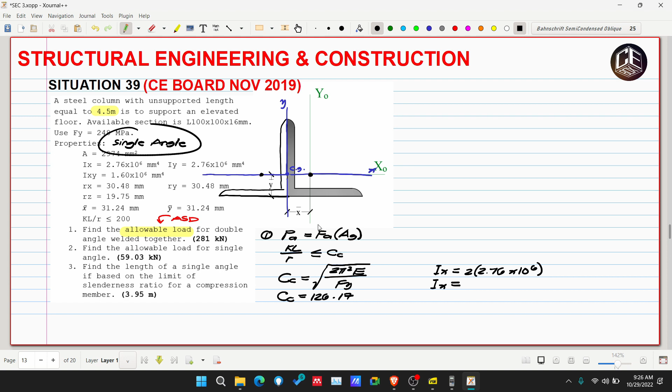So we need to solve Ix first, that's our Ix and Iy. Remember, R is equivalent to square root of Ix or I total over area cross. Let's solve this.

So, 5.52 times 10 raised to 6 millimeter to the fourth. Then, yung ating Iy dito. With respect to y, since yung ating centroid ay wala sa mismong y, kailangan nating gumamit ng transfer formula, para ita-transfer natin siya papunta rito. And remember, ang ating transfer formula is equivalent to I bar plus area d squared.

So, yung I bar natin is yung Iy, ito, 2.76 times 10 raised to 6, then plus area 2974 multiplied by d squared. Ito yung ating d, and yung ating d is equivalent to x bar. Ang x bar natin ay 31.24 times raised to 2, then multiply natin sa dalawa kasi dalawa yung ating angle bar. So, ma-solve natin yung ating Iy.

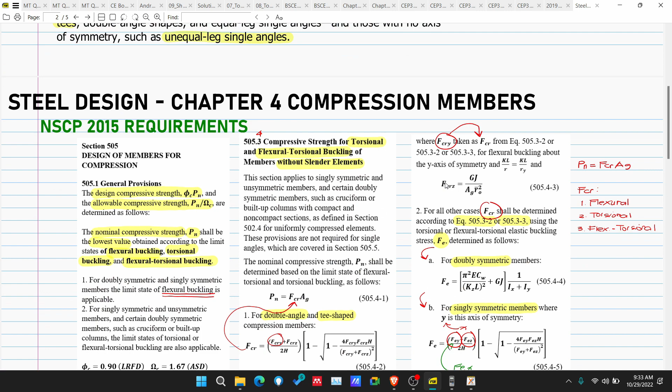Ngayon, kung long column ang ating member, FA or allowable stress is equivalent to 12 pi squared E over 23 multiplied by slenderness ratio. Actually, hindi na ako masyadong familiar dito sa equation na to kasi under pa yan sa old version ng NSCP. Sa NSCP 2015 kasi ako halos nakabase ngayon sa mga tinuturo ko. And ito yung lecture namin sa compression member under sa torsional buckling and flexural torsional buckling. So, ito yung mga equation under sa NSCP 2015 requirements.

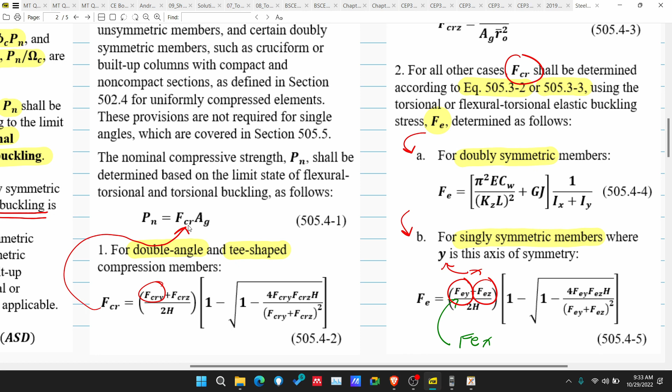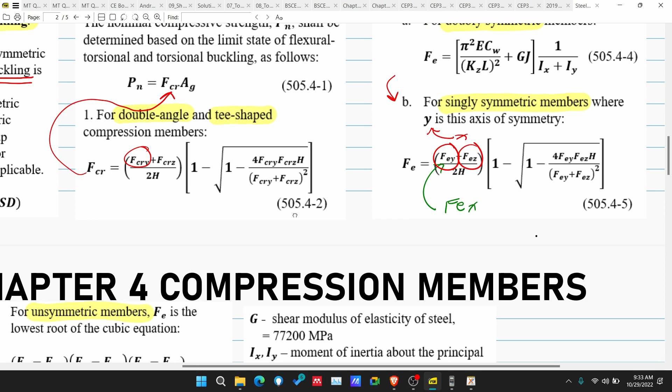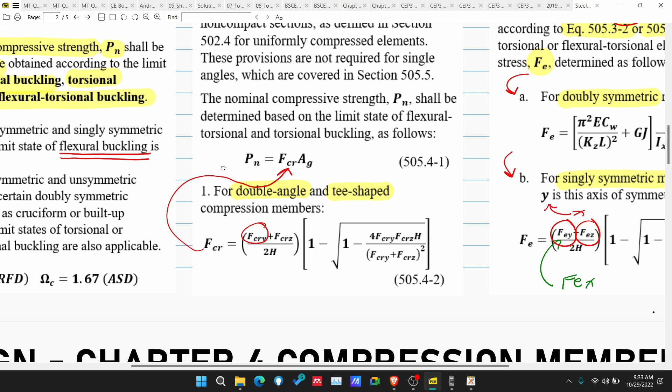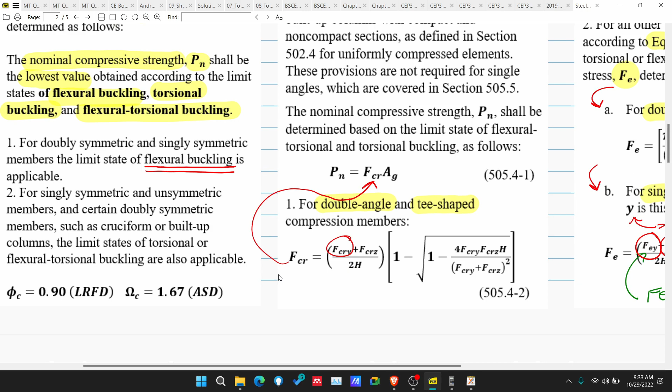Ang pinagkaiba lang naman nila is, actually mas gusto ko yung 2015 kasi ang sinusolve muna is yung nominal load, okay, which is equivalent to FCR multiplied by AG. So, overall equation, ang nagbabago lamang is FCR, depende kung ano yung ating cross-section. So, for double angle or T-shape, ito yung FCR. Then, ito naman for all other cases. So, double symmetric, single symmetric, pero pag unsymmetric member, ito naman yung ating FCR, magiging FE na siya. Then, pag nakuha natin yung FCR, makukuha natin yung nominal. So, from nominal, makukuha natin yung design strength kung LRFD, then allowable strength kung ASD. So, dito lang sila nakakatalo sa dalawang to. Okay, so mas, parang trip ko, ang NSCP 2015. Yan, so ito yung ginamit namin dun sa aming playlist.

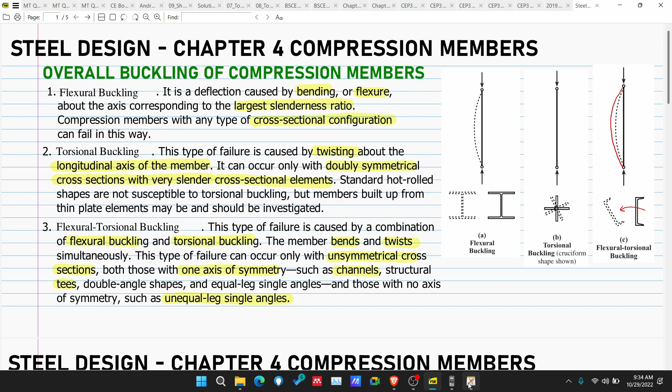Anyway, so tuloy natin yung pag-solve. So, makukuha natin yung ating FA. So, 12 pi squared multiplied by E na 200 gigapascal over 23 multiplied by KL over R, which is yung 147.73 natin. Pero hindi dapat tayo lumagpas sa... so ang ating KL over R ay 147.73 squared. So, 47.19 mega pascal. And then, makukuha na natin yung allowable strength or allowable load natin.

So, this is 47.19 multiplied by AG. So, dalawa to, 2974, then times 2.

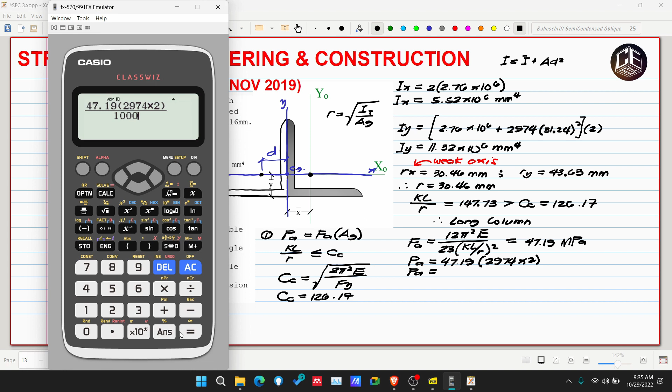Divide natin na 1,000 para maging kilonewton. So, 280.69. Ang sagot naman natin is 281 kilonewton. So, siya na rin yan kapag ni-round off natin.

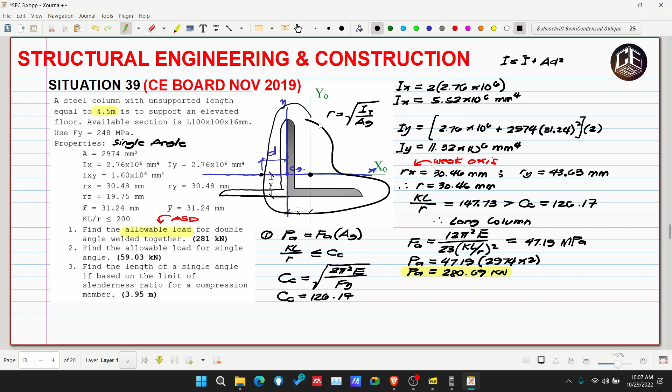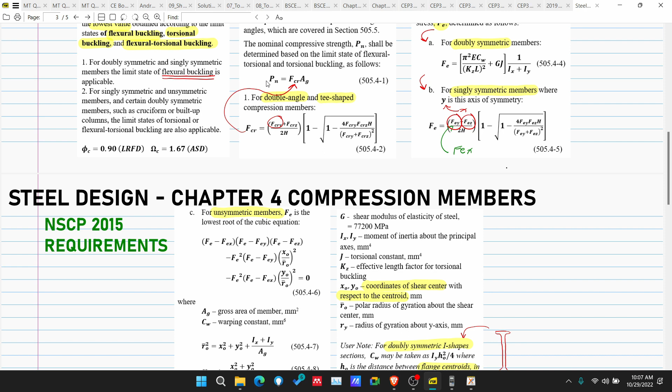Okay, so for number 2, find the allowable load for single angle. Kung single angle lamang yan, okay, ito lang, under yan sa with no symmetry. Kung tingnan natin yung lecture natin sa NSCP 2015, under yan dito, for unsymmetric members. Gamit tayo ng FE, then yun yung substitute natin as FCR sa ating PN. Then, ang equation ng FE is ito.

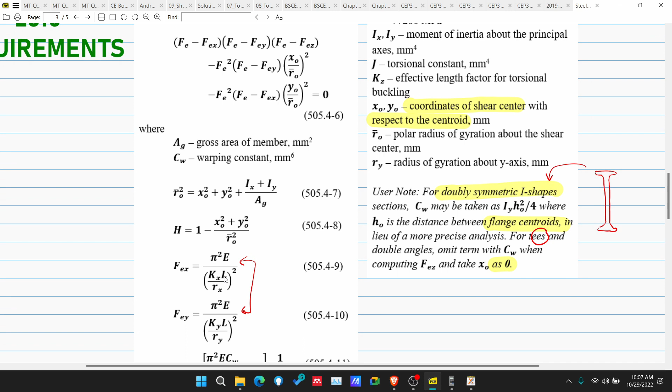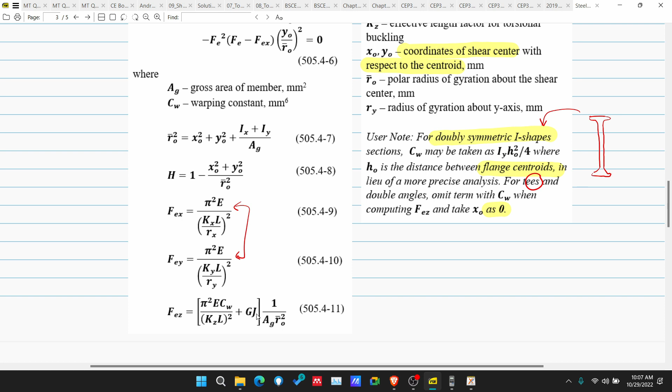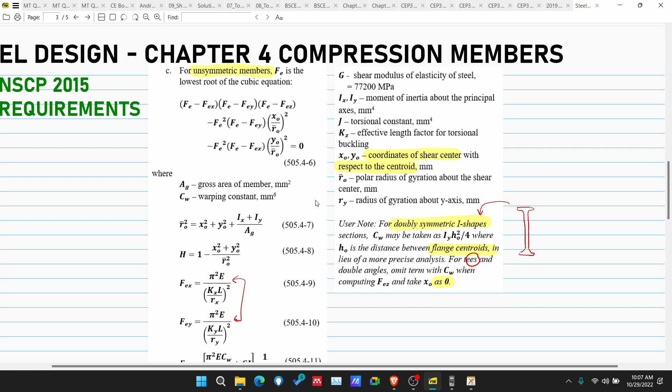Kukuha natin yung FE dito. Though, meron naman tayo mga equation ng FEX, then FEY, saka yung FEZ. Kaso, kailangan given itong mga to: yung KZ, yung J, yung CW, o yung warping constant. Okay, then, kailangan given yung X sub O and Y sub O para makuha rin natin yung R sub O bar. At napakaraming kailangan hanapin rito, pero dapat given din. Based talaga dito sa ating problem, wala naman yung mga given na yun.

So, under pa rin talaga ito sa old version of NSCP. Okay, ganun pa rin naman. Check pa rin natin yung ating slenderness ratio. Pero, yung ating angle is mag-bend sa Z-axis. Therefore, yung ating KL over R is KL over R Z. Ang ating RZ is 19.75.

So, 1.0 multiplied by 4.5 times 10 raised to 3, over 19.75. So this is 227.87, 227.85. Ang ating KL over R is greater than pa rin sa ating C sub C. Therefore, long column ang ating member.

Kaya, yung ating FA pa rin is equivalent to 12 pi squared E over 23 multiplied by KL over R squared. Ang ating FA is, palitan na lang natin yung KL over R dito. Ang ating KL over R na niya is 227.85. So, 19.84 megapascal. Ngayon, ang ating PA is equivalent to, asan yan?

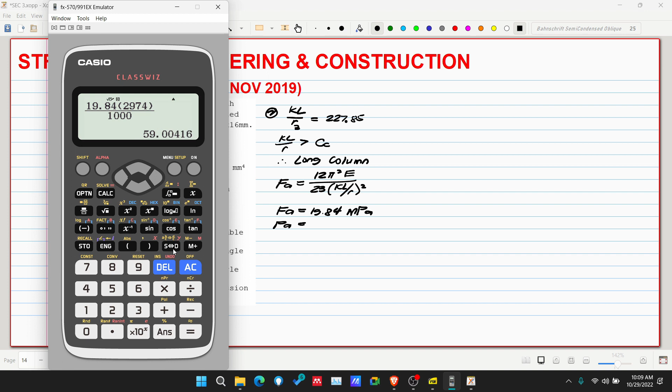Ito, ayan. So, this is 19.84. Tapos, ito kasi naka-times 2, di ba? Kasi double angle yon. Single angle tayo sa number 2. So, tanggalin natin yung times 2. Ang sagot is 59.04, or 004. So, 59.00. Ang sagot is 59.03 kilonewton.

Then, last, for number 3: find the length of a single angle if based on the limit of slenderness ratio for a compression member. Ang limit kasi ng ating slenderness ratio is less than or equivalent to 200. Kung dito mabibase yung ating length, therefore, ang ating KL over R is equivalent to 200.

Ang pipiliin natin na R is yung pinakamaliit, 19.75 millimeters. So, makukuha natin yung L. L is equivalent to 19.75 multiplied by 200, divided by 1.0 na K. Millimeters ang makukuha natin, pero meters ang pinapahanap. So, 19.75 times 200, so 3,950. Divided by 1,000 para maging meters, so 3.95.

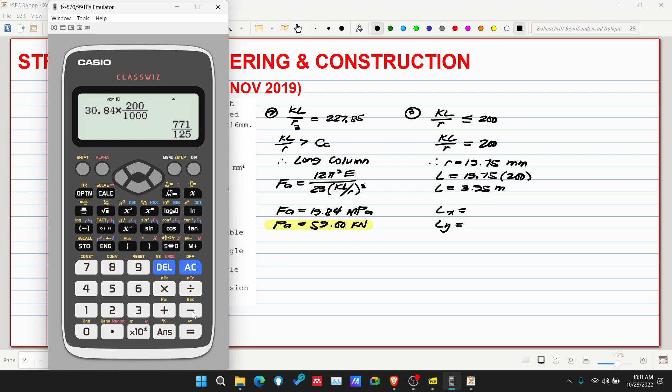Teka lang, 40, pareho na pala. Okay, pareho na pala sila. Ayan, 48 pala, hindi 84. 48. So, 6.10. Ang ating LX and LY is equivalent to 6.10 meters.

So, anong pipili natin sa dalawa, yung 3.95 or yung 6.10? Siyempre, yung 3.95. Kasi, as long as sumahaba yung ating column, o yung compression member, mas masasubject siya sa buckling, hindi ba? Masasubject siya sa failure mode na buckling. Kaya, siyempre, pipili natin is yung pinaka-maliit. Kaya, yung ating L is equivalent to 3.95 meters.

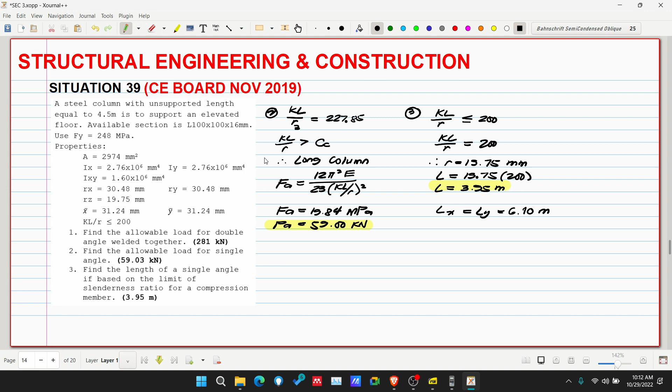Okay, ayan. So, ulitin lang namin, kung since kasi ngayon parang ang ginagamit natin is NSCP 2015, kaya kung gusto niyo matuto on how to solve compression member under sa flexural buckling, torsional buckling, and flexural torsional buckling, you can visit our playlist on steel design. Under chapter 4, ito yung flexural buckling. Then, ito yung second topic na under sa flexural torsional buckling. Visit nyo lang siya.

Ayun na, ito yung ating situation number 39 from CE Board Exam, November 2019.